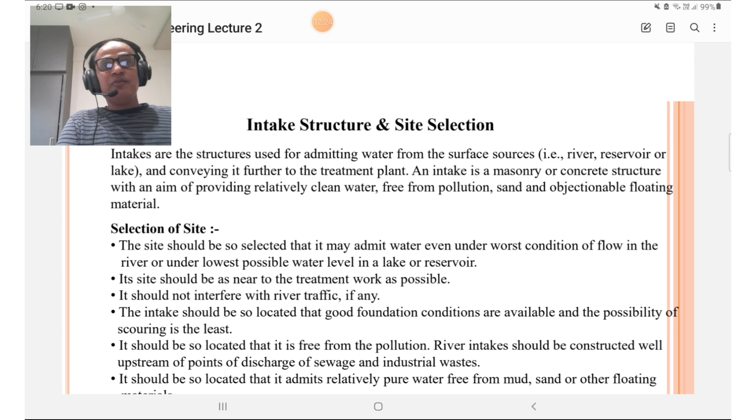So let us discuss about selection of site for intake. The site should be so selected that it may admit water even under worst condition of flow in the river, under lowest possible water level in the lake or reservoir.

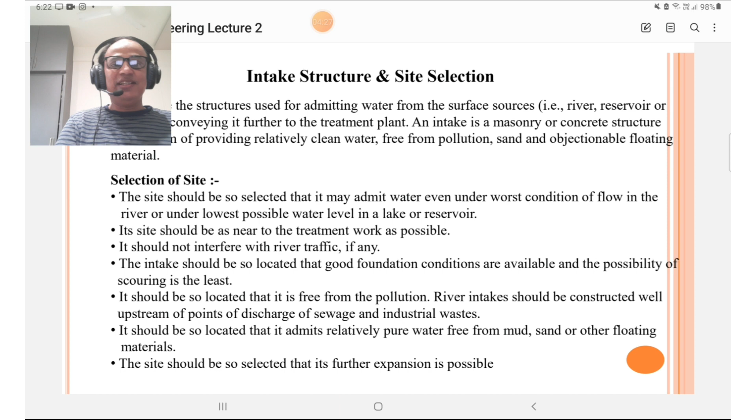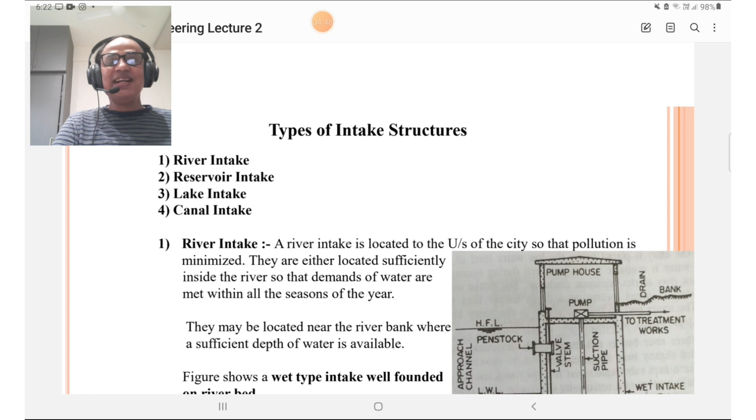Then we are going to discuss types of intake structures. What are the different types? The types are river intake - the name itself indicates it is located on the river side. Then second is the reservoir intake, third is the lake intake, and fourth is the canal intake. So river, second reservoir, third lake, and fourth canal.

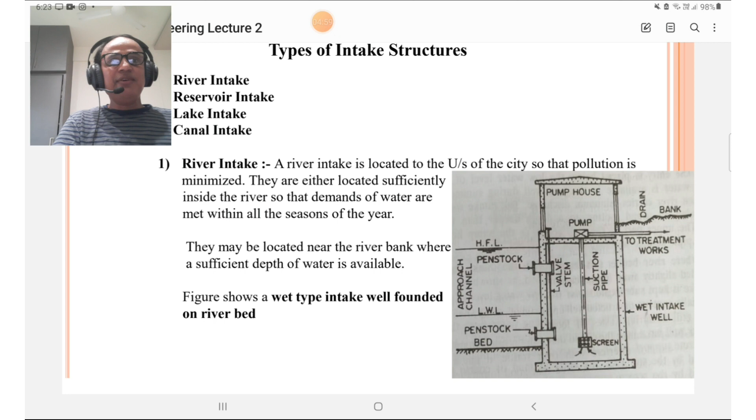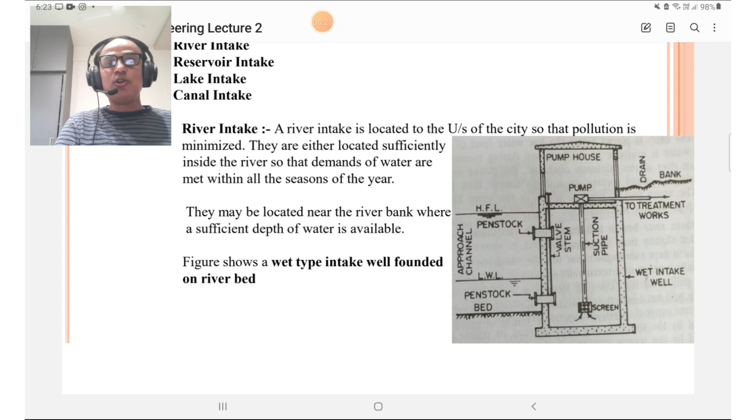River intake: the river intake is located on the upstream side of the city so that pollution is minimized. They are either located sufficiently inside the river so that demand for water is met within all seasons of the year, meaning perennial supply may be available at that site. They may be located near the river bank where sufficient depth of water is available, so depth of water is also a consideration. So let us see this figure.

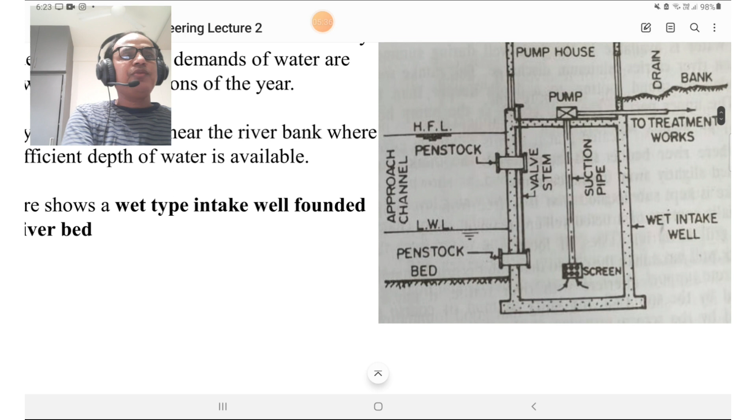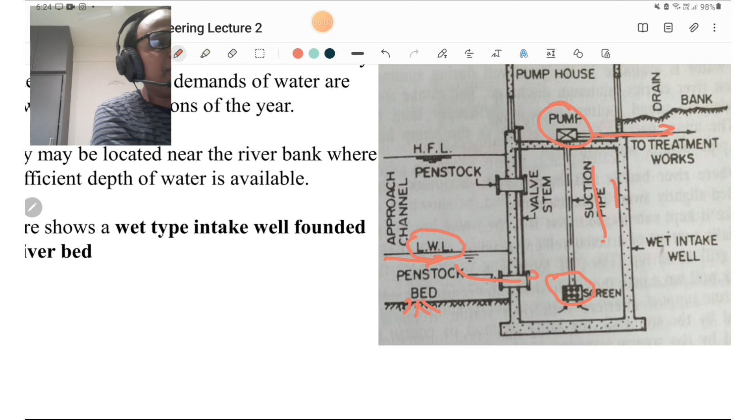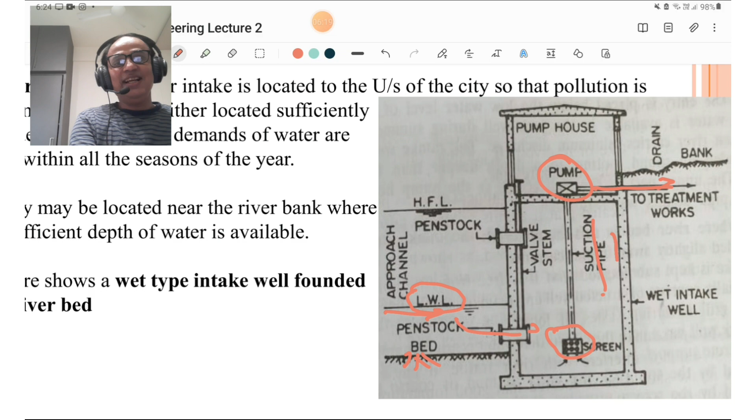This is the figure of a river intake. This is the river bed, and this is the river with the lowest water level. The water is collected through these penstocks and screening is done here. From the screening, a suction pipe is provided on the pump, and water is lifted and transported towards the treatment plant. Remember this figure, because from 2023 all MPSC papers are descriptive, so you must know all the figures and functions of the river intake. This figure shows the wet type of intake well founded on the river bed.

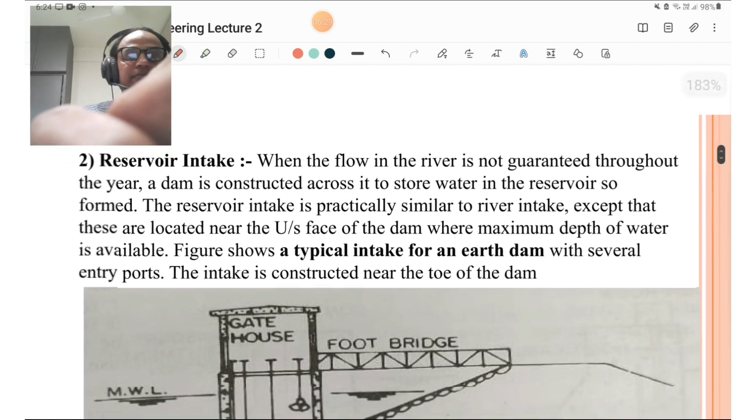Now the second type of intake is the reservoir intake. When the flow in the river is not guaranteed throughout the year, a dam is constructed across the river to store water into the reservoir so formed. The reservoir intake is practically similar to the river intake, except that these are located near the upstream face of the dam where maximum depth of water is available. This figure shows a typical intake for an earthen type of dam with several entry ports. The intake is constructed near the toe of the dam.

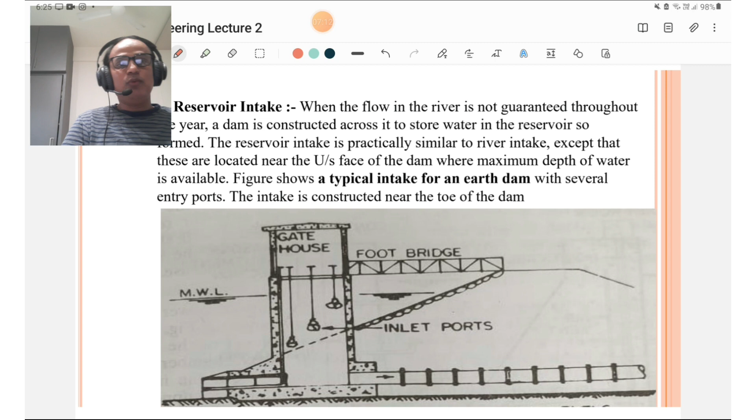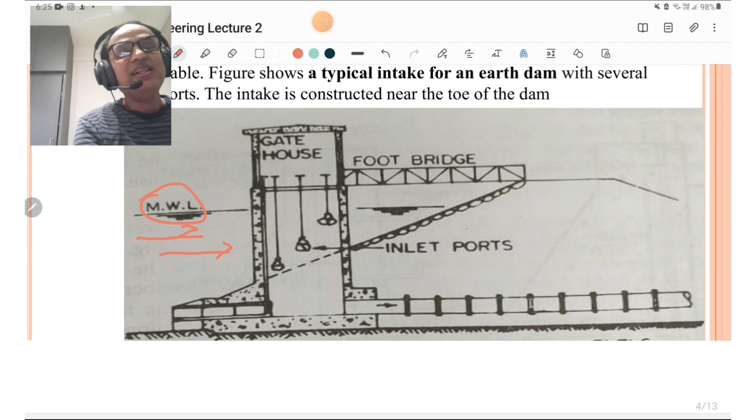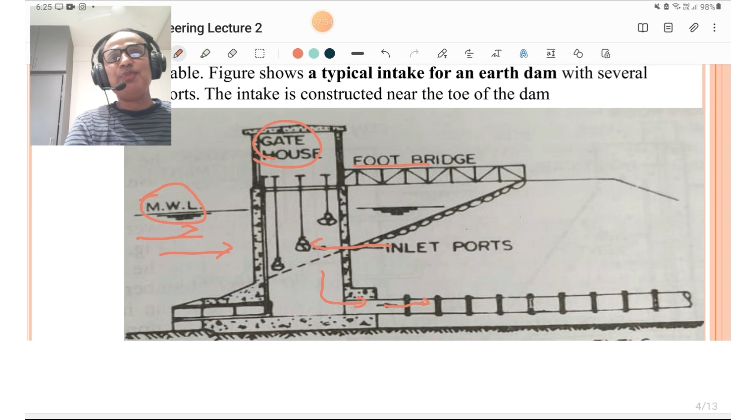Please look at this figure. This is the river, and this is the earthen dam constructed for storing water, so that we get the maximum water level. This is the arrangement: this is the gatehouse, this is the footbridge over that, and these ports are called inlet ports. The water is transferred through this pipe to the treatment plant. This is a typical figure, and you must remember these figures and practice them for descriptive type examinations.

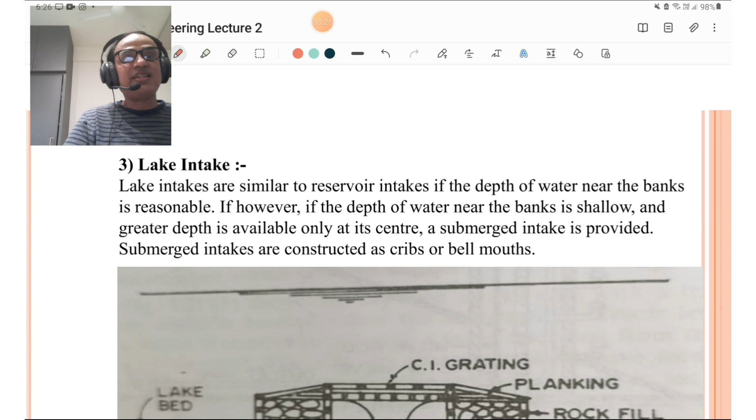Then we are going to discuss the lake intake. Lake intakes are similar to reservoir intakes if the depth of water near the banks is reasonable. If, however, the depth of water near the bank is shallow and greater depth is available only at its center, a submerged type of intake is used or provided. Submerged intakes are constructed as cribs or bellmouth entry. Please look at this figure.

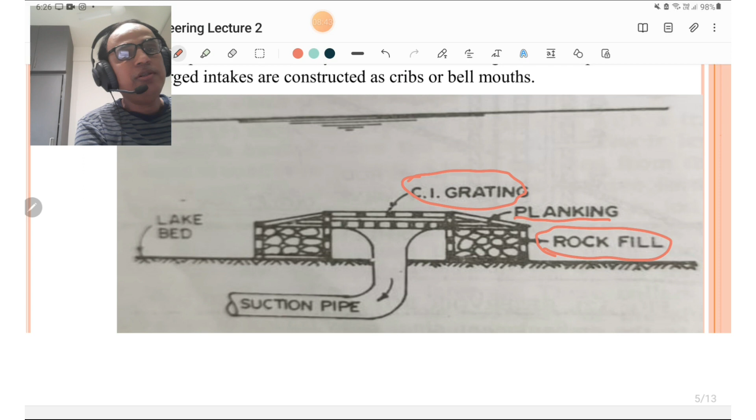CI gratings are provided to avoid the entry of floating debris. Then planking is also done with wooden material. Rock fill type of construction is here, and this entry is the bellmouth type of entry for collecting the water and sending it to the treatment plant. Please remember this figure.

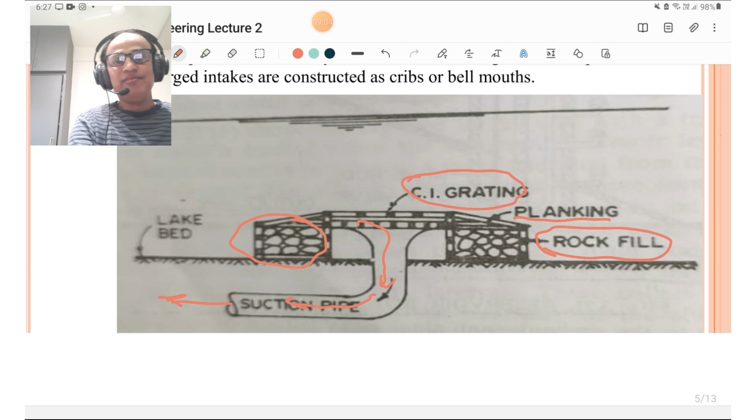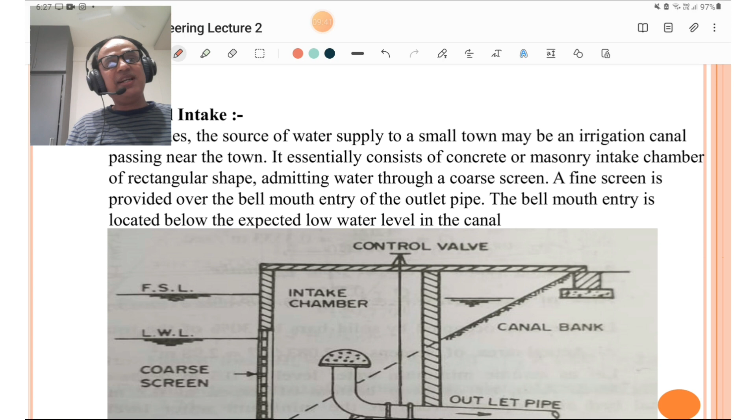Then we are going to discuss the last type of intake, that is the canal intake. Sometimes the source of water supply to a small town may be an irrigation canal or channel passing near the town. It essentially consists of a concrete or masonry intake chamber of rectangular shape, admitting water through a coarse screen. A fine screen is provided over the bellmouth entry of the outlet pipe. The bellmouth entry is located below the expected low water level in the canal, so it should be below the LWL.

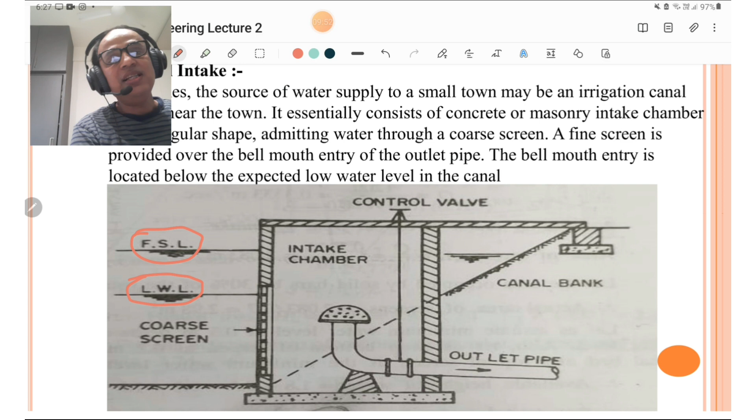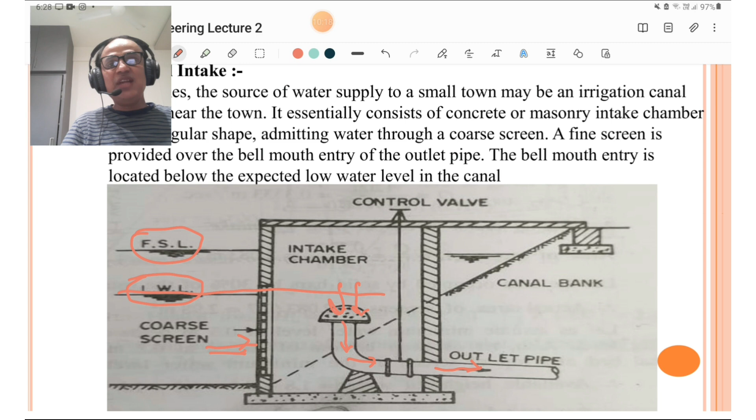This is the full supply level of the canal. This is the low water level of the canal. This is the coarse screen which is provided, and this is the fine screen provided. The level of the bellmouth entry type of suction pipe or outlet pipe is provided below the LWL, and water is transported towards the treatment plant. It is so simple, so you people must get acquainted with these types of figures and the mechanism of river, canal or reservoir intakes.

Then this is the most important topic or point of water supply engineering, that is water demand, and all water supply engineering is based upon the water demand. An average person may consume no more than 5 to 8 liters of water per day in liquid and solid foods, including 3 to 6 liters in the form of water, milk and other beverages. However, the per capita consumption of water drawn from public supply is quite large.

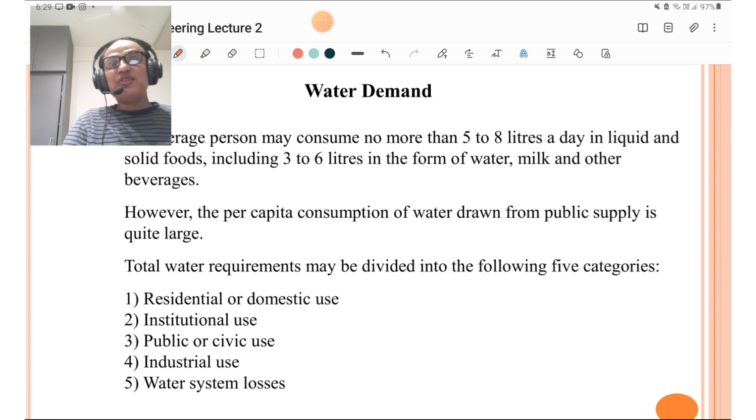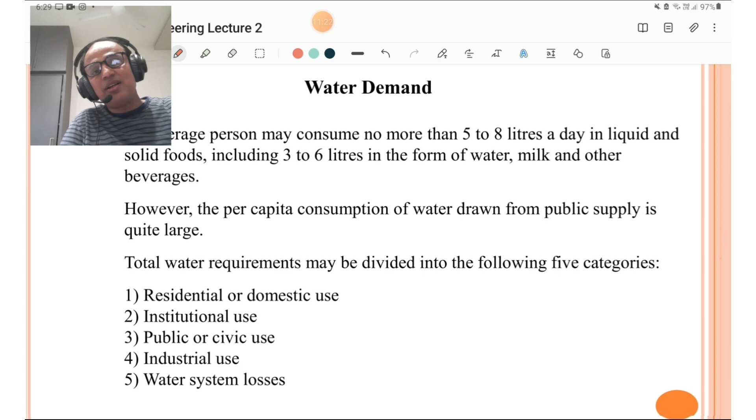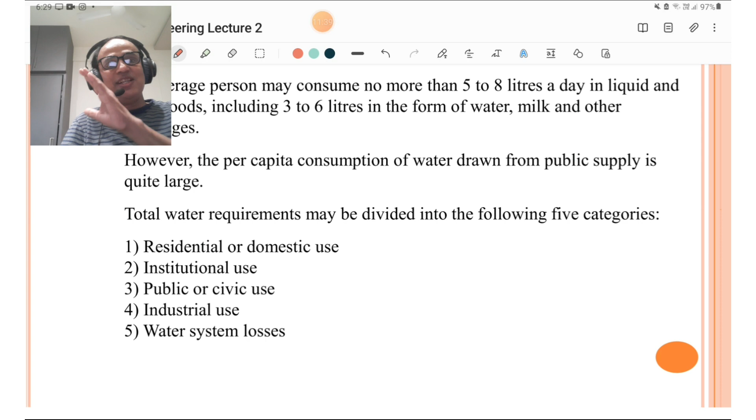The total requirement of water may be divided into the following 5 categories. You must remember these 5 categories of demand. First is residential or domestic use, second is institutional use, third is public or civic use, fourth is industrial use, and fifth is not a use but it is losses, though it is considered in water requirement - that is water system losses, which plays a vital role in any water supply engineering. So you must know how many types of losses are there in water supply engineering.

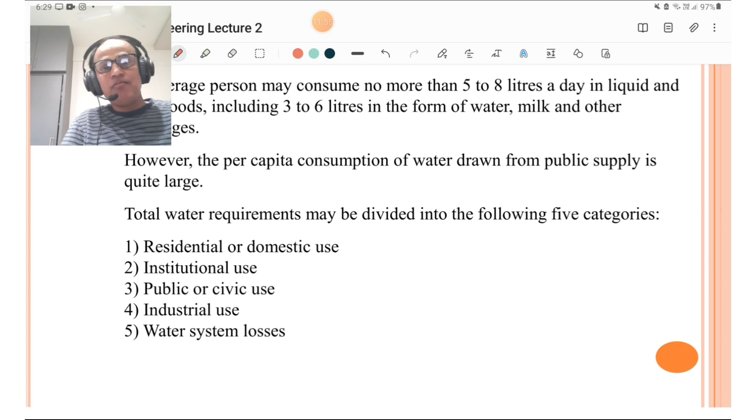First of all, we are going to discuss the residential or domestic use. The residential or domestic use includes the water requirement for drinking, cooking, bathing, washing of clothes, utensils and house, and flushing of the WCs.

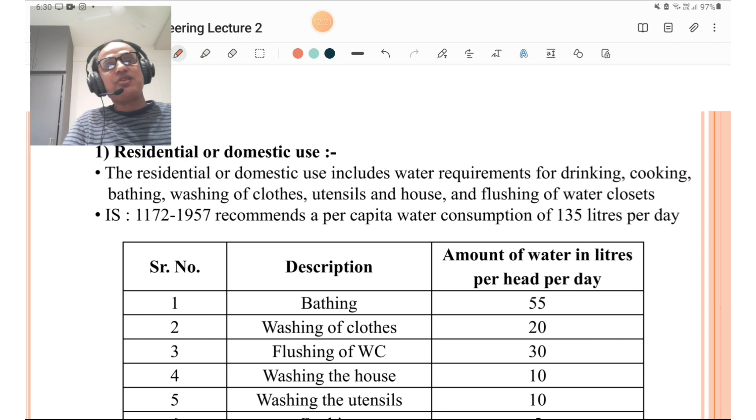As per IS 1172-1957, it recommends a per capita water consumption of 135 liters per day. You must remember this figure. For domestic use, the water required is 135 liters per capita per day. Per capita means per person per day.

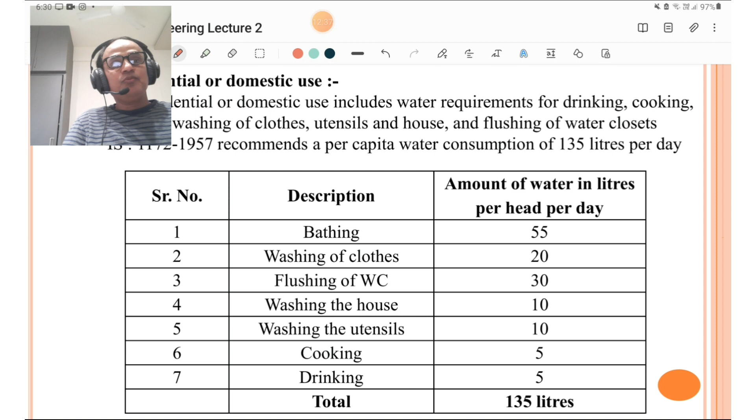For bathing, amount of water in liters per head per day is 55. For washing of clothes, it is 20 liters per capita per day. For flushing of the WCs, it is 30 liters per capita per day. Washing of the house, 10 liters per capita per day. Washing of utensils, 10 liters per head per day. Cooking, 5 liters per head per day. And for drinking, 5 liters per head per day.

So total requirement of water for domestic purpose is 135 liters per capita per day. You must remember all these figures, because all these figures appear in competitive type examinations for objective type questions.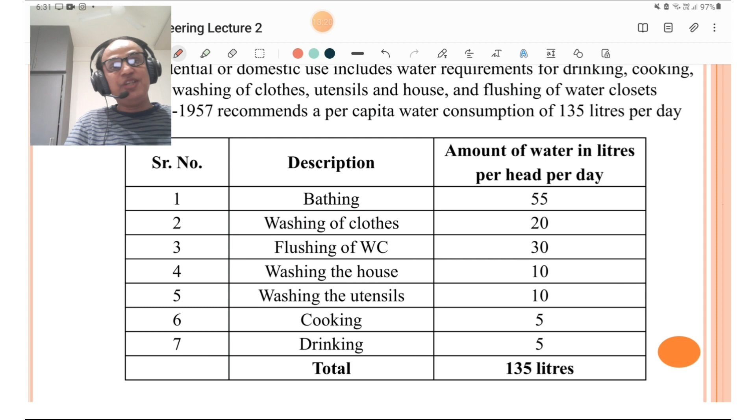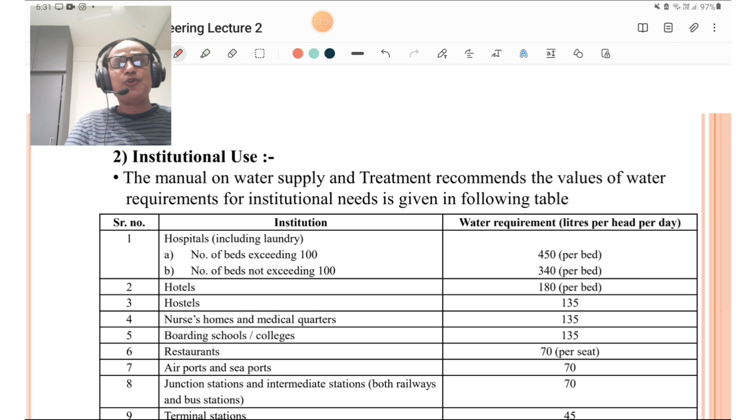The second type of water requirement is institutional use. The manual on water supply and treatment recommends the values of water requirements for institutional needs as given in the following table. You must remember this table. I am going to read and explain this table for you, which is required for competitive type examinations.

For hospitals, including laundry, number of beds exceeding 100, the requirement is 450 liters per bed per day. And number of beds not exceeding 100, the requirement is 340 liters per capita per day. So depending on whether the number of beds exceeds or does not exceed 100, the water requirement is calculated.

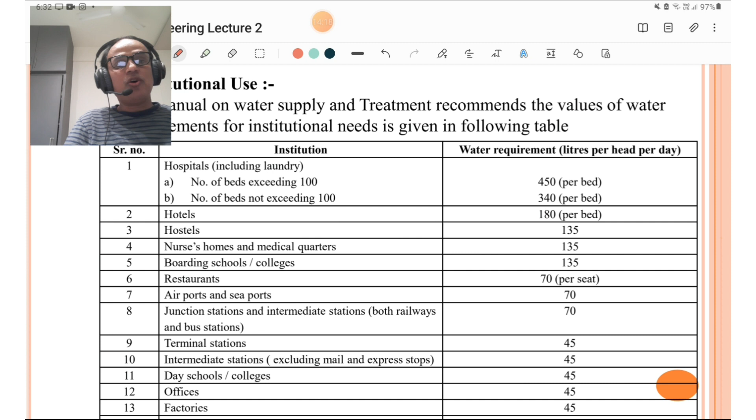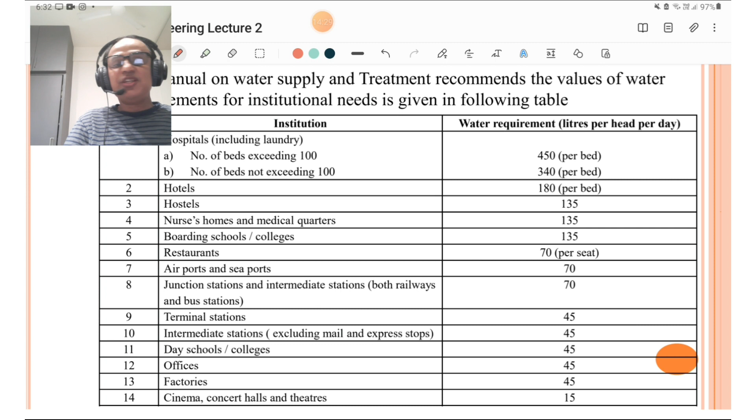For hotels, it is 180 liters per capita per day per bed. For hostels, it is 135. For nurse homes and medical quarters, it is 135. For boarding schools and colleges, it is 135. Then for restaurants, it is 70 liters per capita per day per seat. Airports and seaports, that is 70 liters.

For junction stations and intermediate stations, both railway and bus stations, it is 70. For terminal stations, it is 45. For intermediate stations excluding mail and express stops, that is 45. For day schools and colleges, it is 45. For offices, it is 45. For factories, it is 45. And for cinema, concert halls and theatres, it is 15.

Okay, so please remember all these figures.

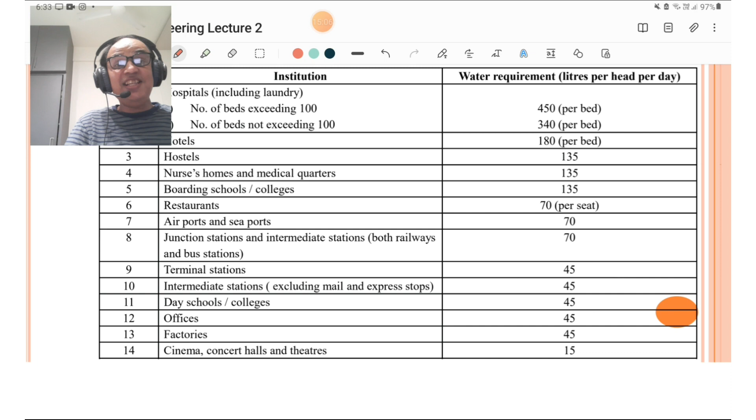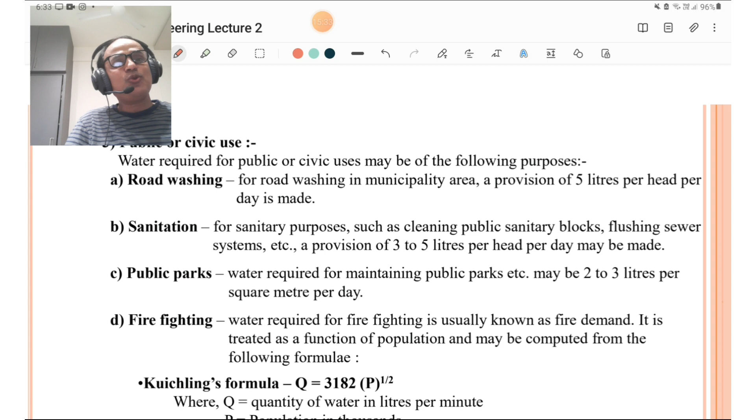Then for public or civic use, water requirement for public or civic use may be divided into the following purposes. First is road washing. For road washing in municipality areas, a provision of 5 liters per head per day is made. For sanitation, 3 to 5 liters per head per day may be made. For public parks, it is 2 to 3 liters per square meter per day.

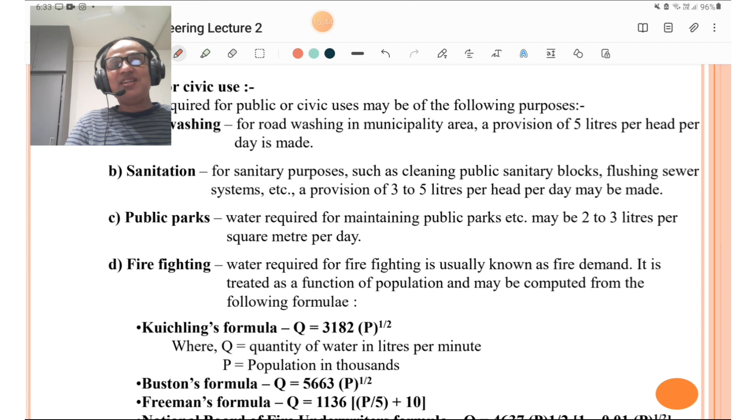For firefighting, it is very important, and questions on it appear all the time in competitive type examinations. To determine the water requirement for firefighting, Kuichling's formula is very important for that. The requirement Q, which is the requirement of water in liters per minute, is given by Q equals 3182 into P raised to 1 by 2, where P is equal to population in thousands. That is very important, population in thousands.

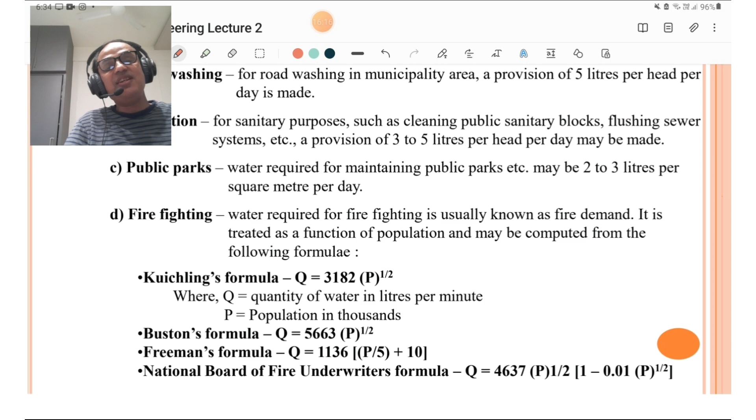Some analytical problems may be appeared in the examinations. We will discuss it in our later lectures.

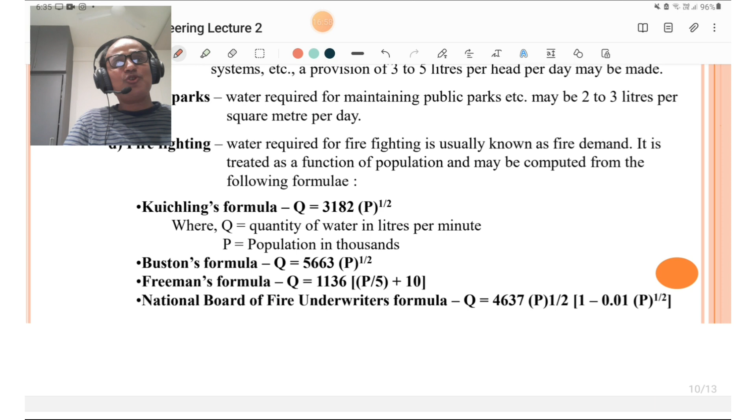Buston's formula is Q equals 5663 into P raised to 1 by 2, and water requirement is more in Buston's formula. In Freeman's formula, Q equals 1136 into bracket P divided by 5 plus 10. For the National Board of Fire Underwriters formula, quantity of water in liters per minute equals 4637 into P raised to 1 by 2, where P is population in thousands, multiplied by bracket 1 minus 0.01 into P raised to 1 by 2.

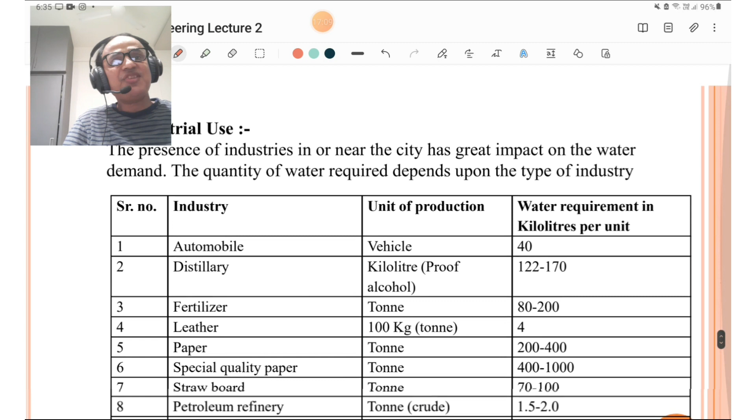Now we are going to discuss industrial use. The presence of industries in or nearby the city has a greater impact on the water demand of that city, and the quantity of water required depends upon the type of industry.

For automobile industry, the unit of production is vehicle, and water requirement is 40 kiloliters per unit. For distillery, the unit of production is kiloliters, and water requirement is 122 to 170 kiloliters per unit.

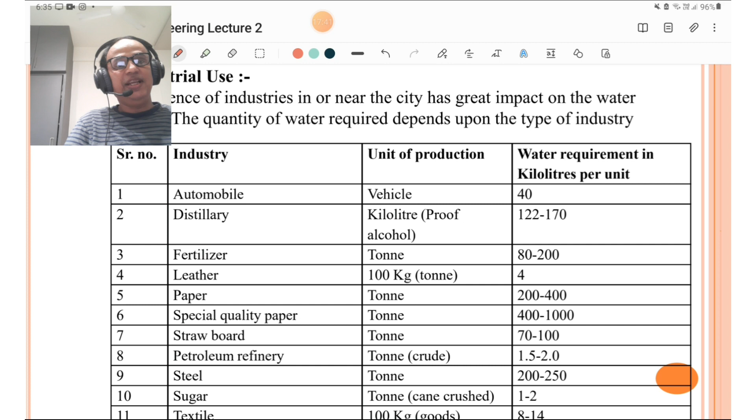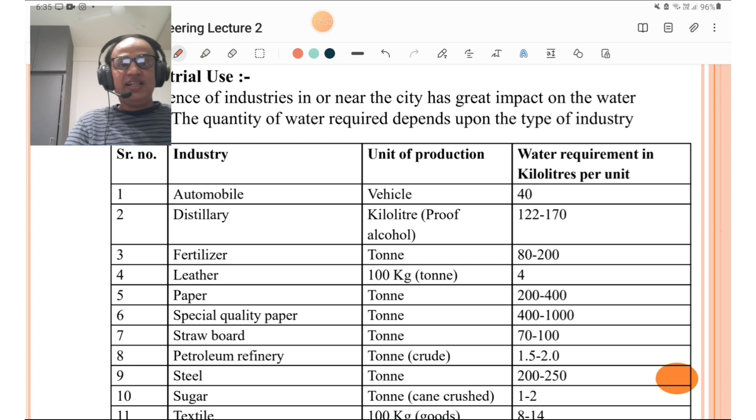For fertilizers, the unit of production is ton, and water requirement is 80 to 200 kiloliters per unit. For leather, the unit is ton, and water requirement is 4 kiloliters per unit.

For paper, the unit of production is ton, and water requirement is more, that is 200 to 400 kiloliters per unit. For special quality paper, the water requirement is higher. There is a paper industry located near the Ujani Dam, where water requirement is 400 to 1000 kiloliters per unit.

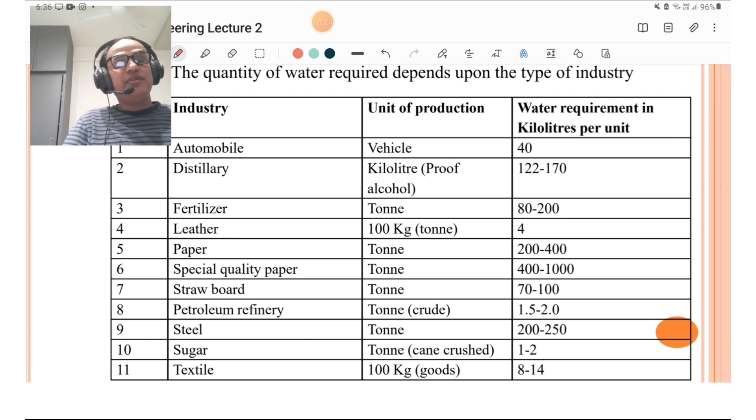For straw board, the unit of production is ton, and requirement is 70 to 100 kiloliters per unit. For petroleum refinery, the unit is ton, and for crude, water requirement is 1.5 to 2 kiloliters per unit. For steel, water requirement per ton is 200 to 250 kiloliters per unit.

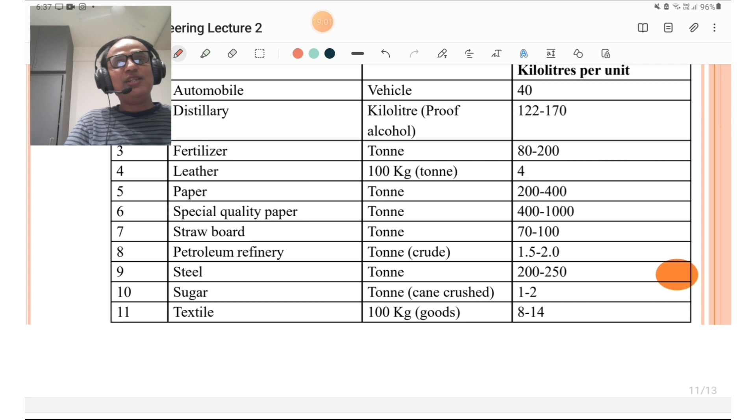Then the last water requirement component is the water system losses. The losses in a water distribution system consist of leakage and overflow from the service reservoirs.

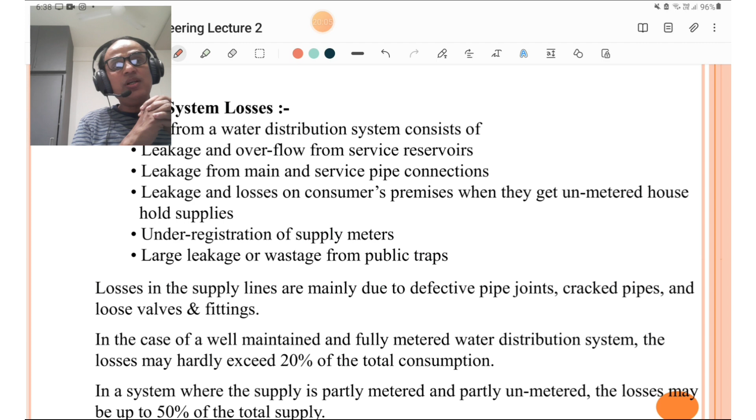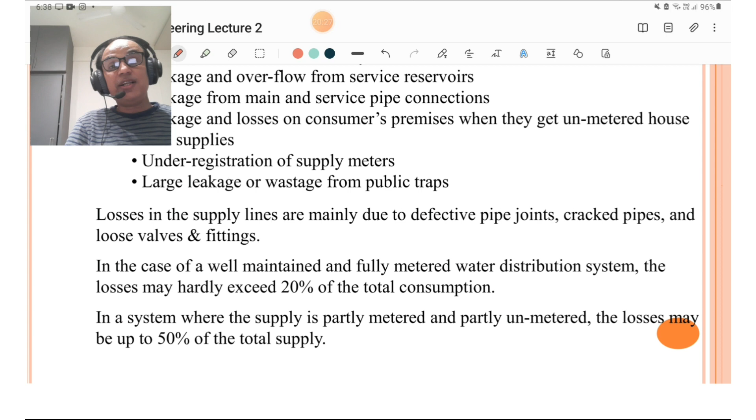Losses in the supply lines are mainly due to defective pipe joints, cracked pipes, and loose valves and fittings. In a well maintained and fully metered water distribution system, the losses may hardly exceed 20% of total consumption. Losses play a vital role in water supply engineering, and in a system that is partially metered and partially unmetered, losses may be up to 50% of the total supply.